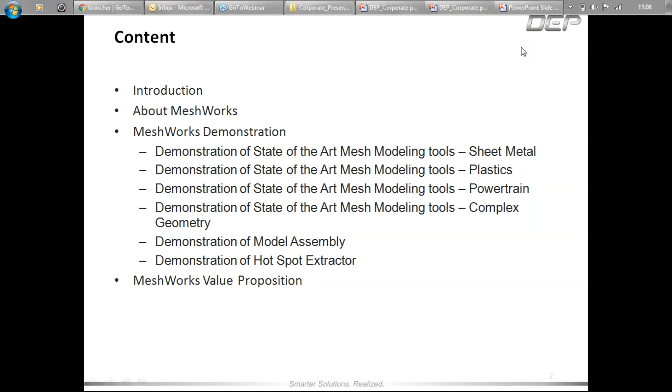Moving to the next slide about Meshworks - I'll skip this and focus on this: together with EDS, we are looking forward to presenting this as a CAE platform, which can help you from model building to model integration, and also enable your CAE/CFD models to the level of multidisciplinary optimization. As Shri Kumar rightly mentioned, from the EDS suite today you are benefited with Tosca, which is doing phenomenal work in the area of topology optimization, and Simulia, which is the solver of choice for many nonlinear purposes.

Meshworks will come in very handy if you are trying to build a design space for Tosca or a parametric model for Simulia. That's exactly what we mean by calling it a multidisciplinary optimization front-end tool.

This will enable you to go all the way from automotive. If you're from an aerospace defense industry, you will still find it relevant. If you're from a heavy engineering background, there also you will find it relevant. If you are even from biomedical or biomechanics, even then the entire tool set is very relevant, because Abaqus or Simulia is widely used for hip implants, knee implants, and cardiovascular devices. You will also find it relevant if you are looking at shipping, as well as energy, which is the oil and gas sector.

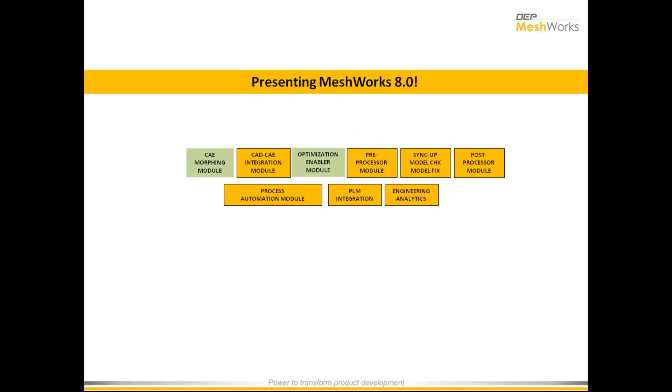And Meshworks is not a new kid on the block - it has been around for quite some time. We are the leaders in morphing finite element and CFD models and preparing them for optimization.

Now, what has happened is, from Meshworks version 8 onwards, we have integrated all the CAD libraries so that we could right away take the model from CATIA, in the native format or as an IGS, STL, or STEP format, bring it into Meshworks, do all the model building work, and then export it to Simulia or Tosca, depending on which is your solver platform.

And then if you want to set it up as an optimization, you readily have the complete parametric library in Meshworks. You can parameterize your FE/CFD models and get them ready for optimization. Meshworks also provides a process automation module, where you don't need to be an expert in TCL, TK, or Python. So a CAE user can create process automation for his entire standard operating procedure. That's the value that DEP brings to the table.

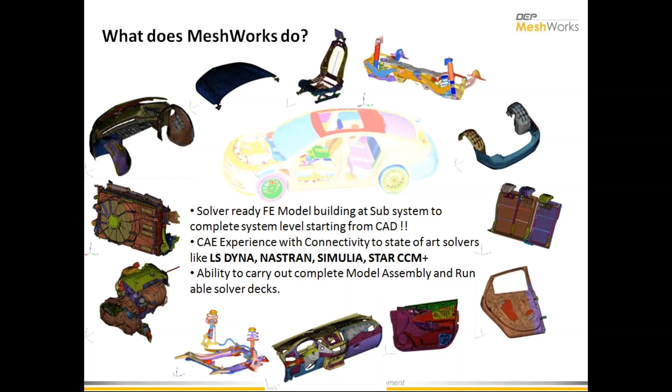The other benefit of Meshworks is that it can prepare models of different kinds, especially in this automotive context—interiors, exteriors, body structures, powertrain components, driveline components—all of it can be modeled as components, subsystems, and assembly, and also get them ready to run in Abaqus or Nastran, Simulia. For CFD, we could get it ready to run on Star CCM and Fluent. So you can essentially call it a CAE platform for your model building exercise.

A brief attention to the key differentiators, as CAE users you have the option of multiple model building platforms, and we do appreciate that. The key differentiator from the Meshworks perspective is that the models you build in Meshworks are automatically parametric, like how we build in CAD. So making a fillet radius change and all that becomes very easy.

With the integrated modeler, in the time it takes to build a durability model and an NVH model, you can start off with a durability model, and at the same time the NVH model is a derivative out of that—so you can derive one model out of the other very quickly. That's the power of the integrated modeler, and it almost saves you 50% of the time in terms of model building.

An automated modeler is also very important—like I mentioned, we don't have to be an expert in TCL, TK, or Python to create automation in pre-processing. Meshworks does it for you.

And the associative modeler is a very powerful tool, where if you have an existing mesh and a new CAD, the mesh can be automatically updated to the new CAD. That's quite powerful, and these are the features that make Meshworks stand out and really help the CAE users.

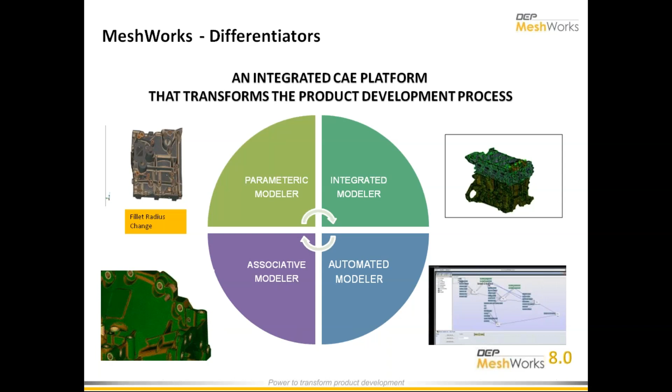We have a long history of partnership with Simulia, as well as with iSight and Tosca. So users of Simulia are already getting benefit if they are also using Meshworks at certain locations. We already see some solution architectures where models from CAD are driven into Meshworks, and then a parametric mesh model from Meshworks is working with Simulia. The value is a very tight workflow for you, which saves a lot of time, and the data goes in and out seamlessly.

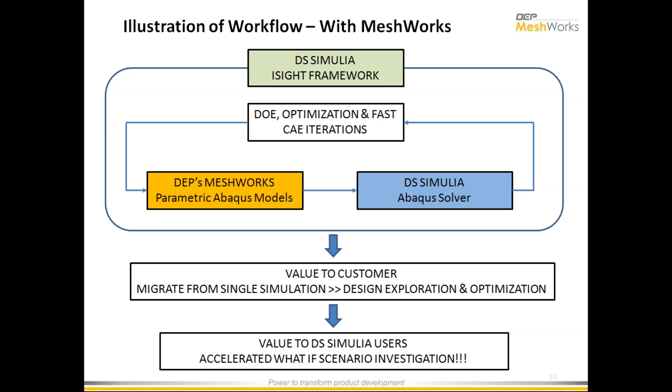That is very important for you whether you're looking at pure play engineering judgment based work, or if you're looking at an optimization based work. Even then, with either a Tosca workflow or an iSight workflow, Meshworks is there for you to handle the mesh models. So we have a completely built up multidisciplinary optimization architecture with Dassault Systems products.

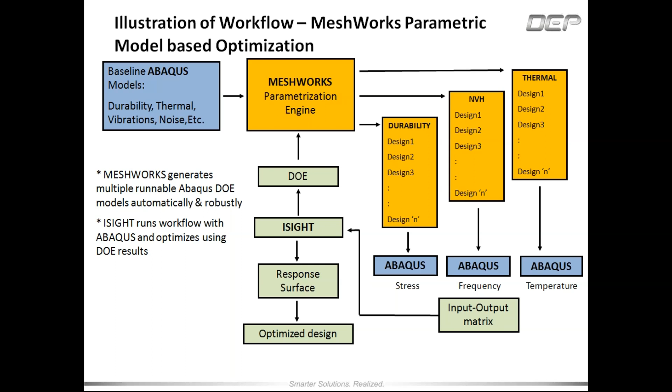This is also available—we have published several literature, and we will be sharing that through EDS to any of you who want to access it. So it's a pretty versatile platform, since if you're having CAD on one side and the Dassault solvers on the other side, Meshworks nicely packages in between and helps you take your CAD model and get it ready to run on these solvers.

So this was the introduction that I wanted to present to you, and I would now share the stage to Gautaman, who is going to walk you through and mention the advantages of our mesh modeling tools, which is the bread and butter in terms of sheet metal modeling.

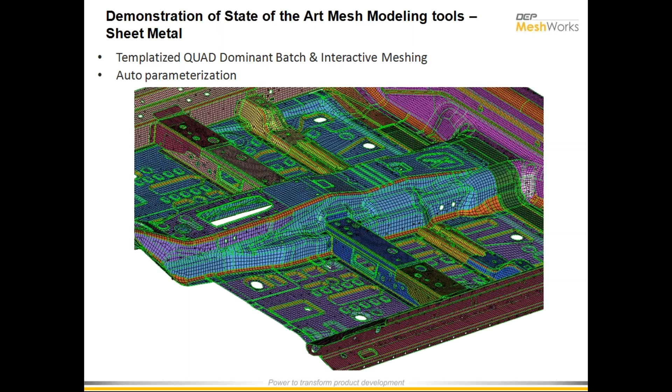And subsequently we will also see how Meshworks really works on complex plastic models—it not only meshes them but also assigns the thickness and gets them ready to run on the solver. There are some examples that my colleague Gautaman is going to share with you. I'm just browsing through the screen so you get an idea of what we have in store.

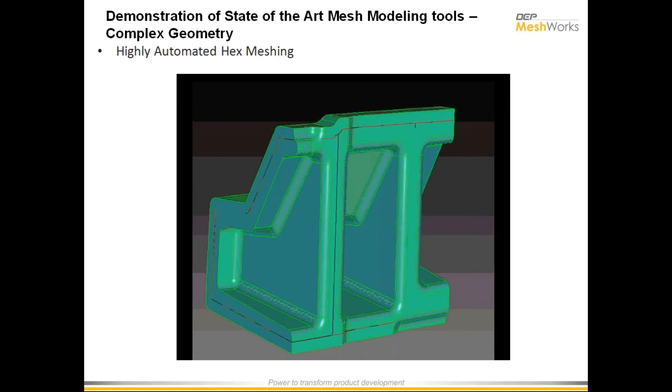He's also going to walk us through hex meshing as well as tetra meshing related areas—one example of complex intersected geometry and how hexa meshing is done. This is not the typical hexa meshing we're used to in other pre-processors; there's a unique way, and Gautaman is going to share that with you. Some of these things can be done in a few minutes, especially the intersected hex meshes.

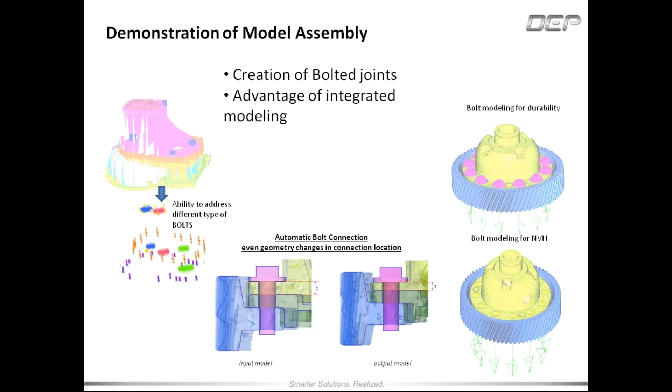We're also going to share some of the model assembly tools, be it 1D model assembly as well as 3D model assembly with contacts and pre-tensioning, which we are used to in Abaqus. We'll also pay attention to automatic contact fixing tools, which is a very important requirement for Simulia users. We're going to pay brief attention to that, and then we'll also see the hotspot extractor.

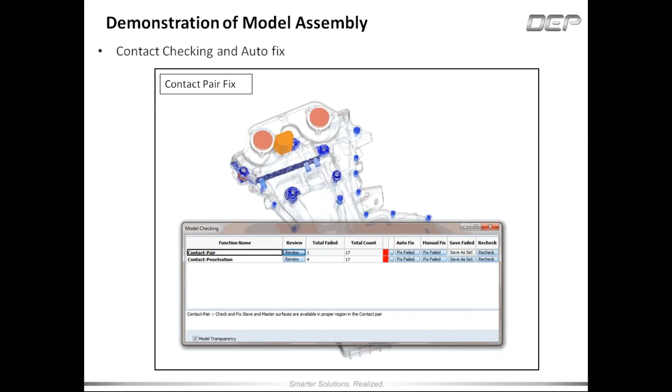This is another tool where even if you are running analysis with multiple load cases and we have different hotspots at different locations from different load cases, Meshworks helps you see a unified picture and identify all the hot locations in one shot. This can help us do downstream parameterization or feature-based addition to make the geometry better and meet the requirements.

So on a whole, this is what Meshworks saves you. It saves close to 40% of your modeling time at the very least. And there are certain very powerful tools like integrated modeling, parametric, associative, and automated modeling, which are going to save a ton of time for the user. That is our key idea that we want to present through this webinar.

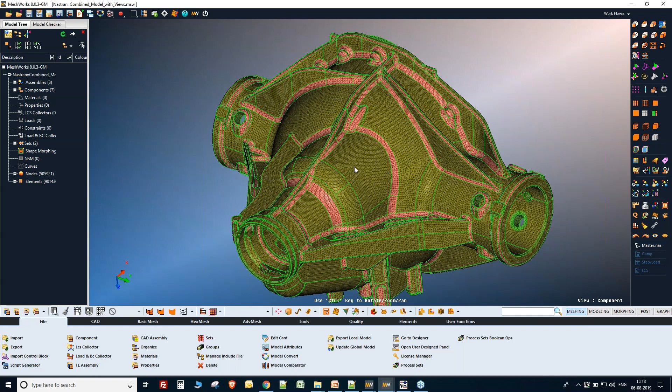As the process is running, I'd like to go to the other window where I've generated this tetra meshing and explain what is actually happening in the model. As you can see, based on the templates, the fillets are nicely identified and organized into different collectors. So I'm just going to open the mesh control panels.

This is what the mesh control panel is going to look like. It consists of all the necessary inputs like the mesh type, the target element size, etc. And we have the feature identification parameters where we identify tubes and apply specific mesh conditions on these tubes, as well as create washer zones if required by the user.

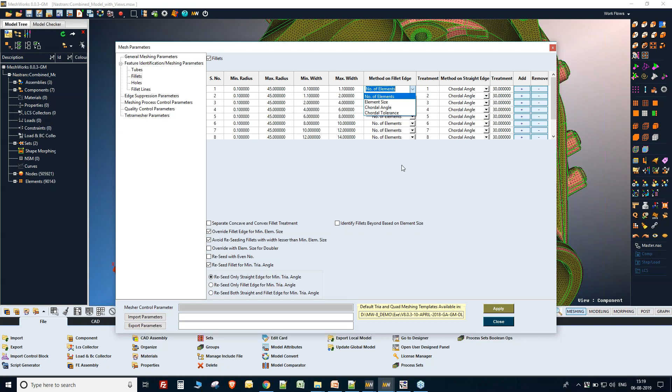Similarly for fillets, the user can add multiple rows. He has the freedom to choose whether to go by number of rows of elements, chordal angle, chordal tolerance, or element size, etc. Finally, we have holes and fillet lines for sheet metal components, edge suppression parameters, process control parameters, and quality parameters, which include both 2D level as well as 3D level. And finally we have the tetra mesh parameters.

One interesting point here is the user can also choose a layered tetra mesh if required, even for casting components with variable thickness. The tool automatically identifies in the background where there is a uniform section and keeps the number of layers as specified by the user.

Now that we have seen the template, I'll walk you through some of the locations where you can see the three collectors, which is fillets, and then we have the tubes along with the washers as per the mesh template and the non-feature region.

So the identification and the mesh application is done in the background based on the template. I'll just give it a few more seconds for the process to complete.

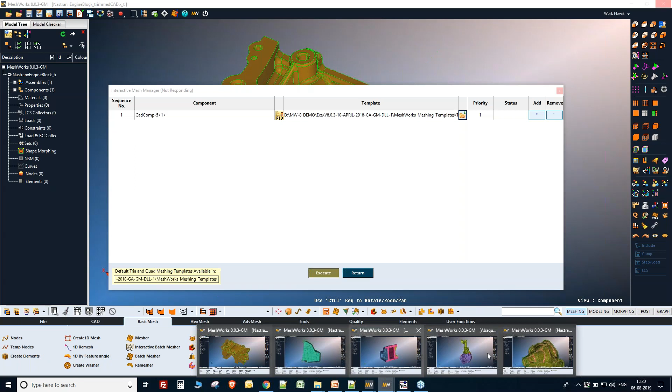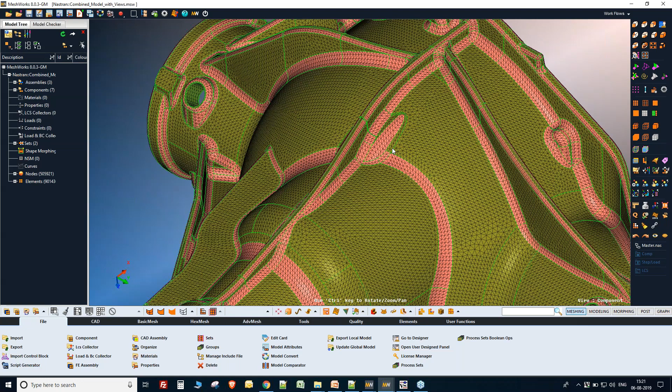So here we are not doing any kind of CAD cleanup on the model in order to provide a good mesh flow or a good mesh quality. Everything is taken care of in the background itself. Once the process is completed in this particular model, I will zoom in on certain locations and show that to you.

So here the user can add multiple rows. This is an interactive batch meshing process, wherein the user can load an assembly model and choose a lot of components for a single template, which can be tetra meshing or sheet metal meshing, etc.

This is also available as a batch mode, meaning that you can create a folder which has different assemblies, and then just give this folder as an input so that you don't have to load the model in the background.

And the cool feature is even if you have an assembly with a lot of sheet metal components and a lot of welds, sometimes the weld data also is there in the assembly. Even though you can just give it in batch mode, the tool automatically identifies all these kinds of sheet metal components and only meshes those parts.

So now that we have completed the tetra meshing, I just do a return, and now all the components are organized into different collectors. Let me do an auto color where you can see nicely the fillets, the tubes, and the washers.

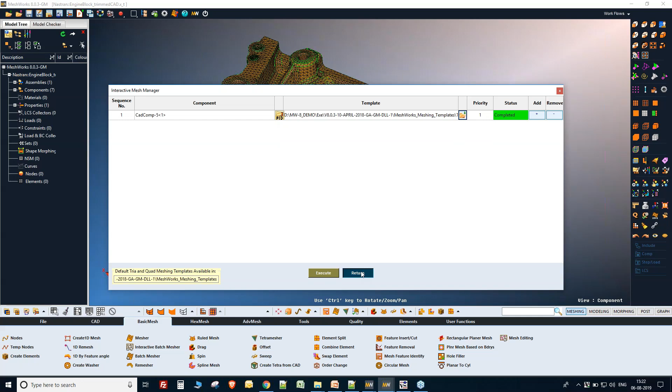And it's quality correct as well. So you have both the 2D level and the 3D level. Let me just hide the skin.

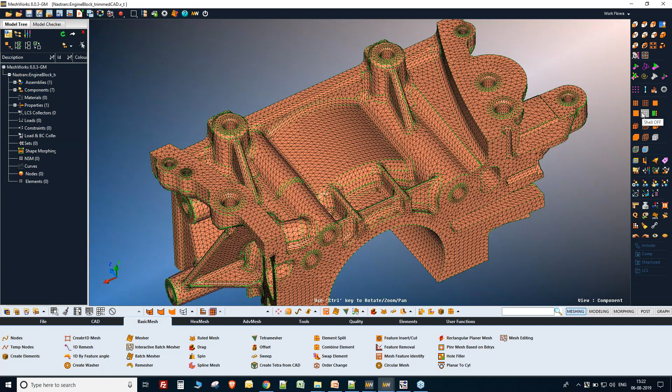And if I zoom on to some of these locations, you can actually see some sliver surfaces, and all these sliver surfaces are corrected in the background itself so that all the elements are passing the quality criteria.

And the next important point here is, as Karthik mentioned, once we do modeling in Meshworks, the model becomes parametric, meaning that after doing the post-processing, I want to improve the stresses in these regions.

So naturally, I go to fillet radius change. And if you want to do any parameterization on these fillet radius changes, it's very simple. We have a standard parameter called auto parameterization casting, which enables the user to just select the surfaces he's interested in and provide a range of value and create the parameter.

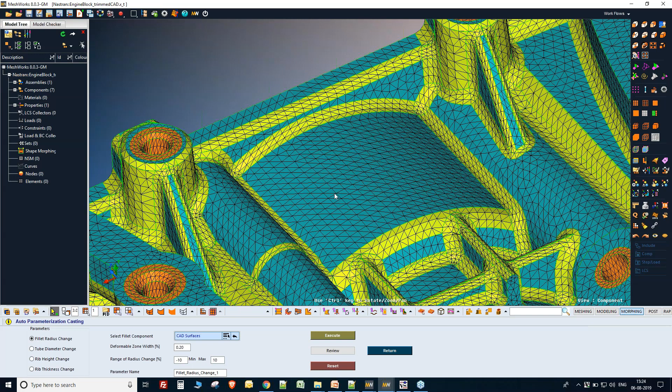So we have 4 standard types of parameters: fillet radius, tube diameter, rib height, and rib thickness. In this case, let me just select a couple of surfaces where I would like to do the parameter and provide a range. It's going to be a percentage change, minus 20% to plus 20%. And just execute - it's just a simple selection and execution.

And once the process is executed, the tool nicely gives feedback of what is the current radius of the fillet. In this case, it is given as 3mm. And as we review this parameter, let me link the parameter.

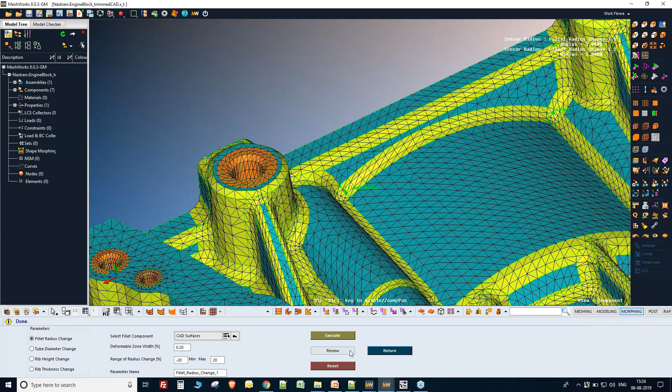So now the radius has been changed from 3mm to 3.6mm, and then I'm now reducing it. All these changes are on the FE level. So this is the fillet radius change.

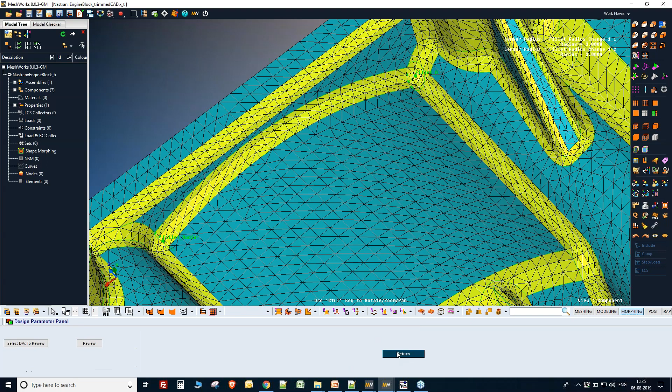And I would like to also show you another example where we are going to change the rib height thickness. Let's say we would like to improve the stiffness in these regions, and the user can just go into the rib height change parameter, select the surfaces that you would like to change, and provide a range. In this case, I'm going to provide minus 1.5 to 1.5, which is an absolute value, and just execute.

So the tool intelligently in the background identifies all these kinds of features. Since we have done the meshing, the intelligence is stored in the file, and this enables the user to quickly do all these kinds of changes.

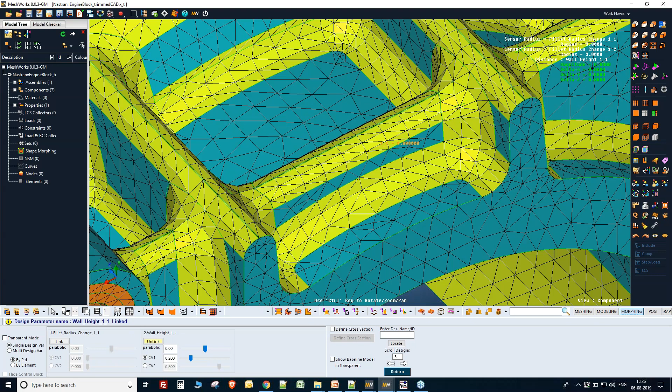So let me go ahead and change the parameter. So this is the rib height thickness change.

And similarly, we have other parameters which will enable you to create a parametric model quickly based on your post-processing results.

And moving on to the next demo, I would like to show you the plastics meshing capability. Many times we spend a lot of time doing these kinds of plastics meshing. Simple plastic parts like door trim, hard trims, even though they look very simple, a lot of time has been spent on quality correction, feature capturing, and thickness assignment. And even when we go to complicated plastics like front fascia, rear fascia, bumpers, exterior components, etc.

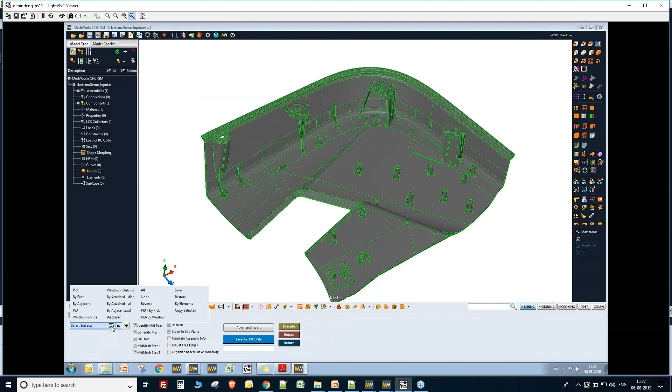So in Meshworks, it is a fully automated process wherein the user can go into the auto midplane mesh generation, choose all these default steps, which is identifying the features, the midplane pairs, generating mesh, stitching all these features like dog houses and locators together, and then inserting these features onto the base mesh, doing all the necessary mesh flow correction and quality corrections, and making sure the output of this tool is exactly in the mid location. We have inputs based on element size or identification of pairs and remesh quality, etc.

So I've just selected the model and I'm just going to say execute. Since it's going to take a couple of minutes to complete the process, I would like to take you to the next window where the process is actually executed. It just takes like 3-4 minutes to complete this process, and here it has been completed.

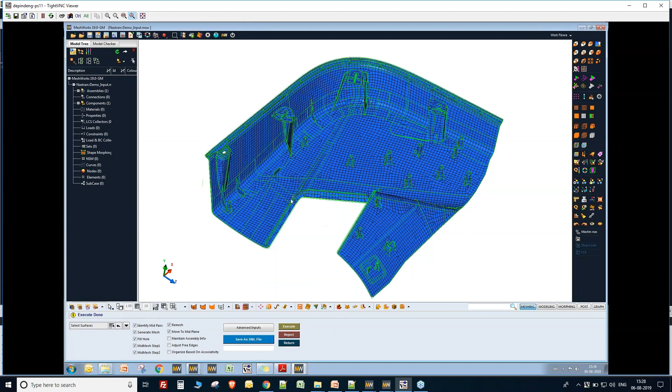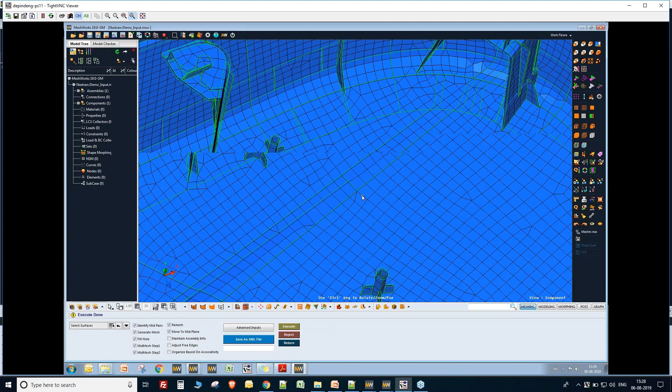So ultimately, the output is going to be a mid mesh that has been completely stitched and flow corrected, quality corrected, etc. And as you can see, the tool nicely identifies all the kinds of features in the CAD model and preserves them when doing this auto meshing.

So in one shot, the user can expect a good auto mesh. There are also certain tools which enable us to do a lot of manual work, which is what I'm going to show as the next demo.

In this model, I've just executed the first two steps, which is primarily identifying the mid pairs and generating a mesh. So all of them are not stitched together. Now, if the user wants to go through a manual route, let's say because of improper CAD data, certain areas are not stitched together, the user has the freedom to use these nice tools to quickly complete this task.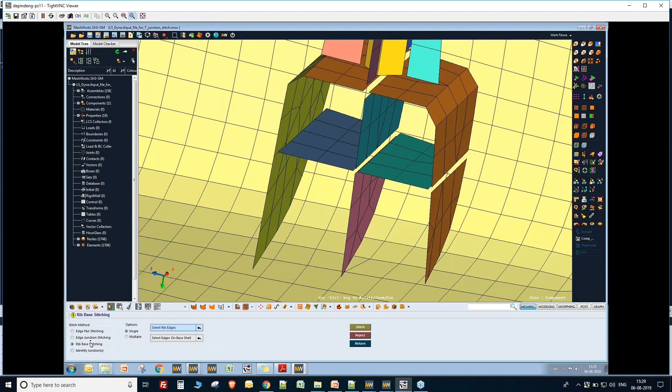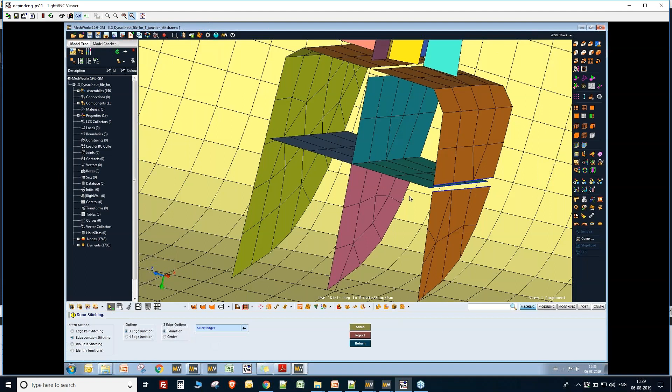In this example, we have a 4-junction rib wherein I can directly go into the junction-based stitching and select all the 4 edges in the model. Once the edges have been selected, you just do a middle click and it gets stitched. Similarly, we have some 3-junction capabilities where the user can select all the 3 edges in the model and then just say stitch. So this is a kind of manual route.

The user, if he prefers to go to a much more automated route, that is also capable and available in MeshWorks. Here, I'm just going to select the entire model, and in this particular area, where there are a couple of junctions, I'm going to give a tolerance and say identify junctions.

So the tool nicely identifies automatically the 3-junction, 4-junction, etc. And in one shot, we can select all these assemblies and then say stitch. So this is also possible - the manual route as well as the automated route.

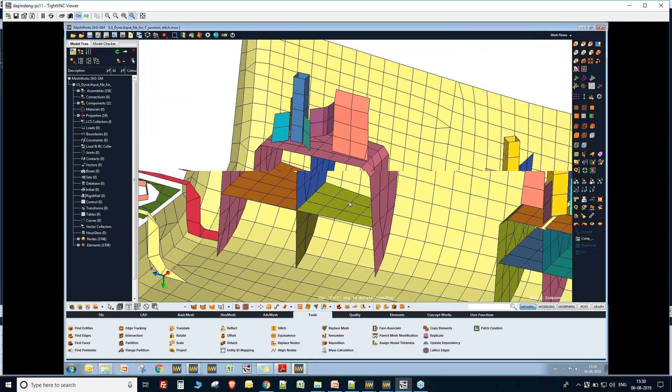So the output of this automated tool is going to have a very good effect, that nicely preserves the features as well as the quality. And the second aspect is thickness assignment.

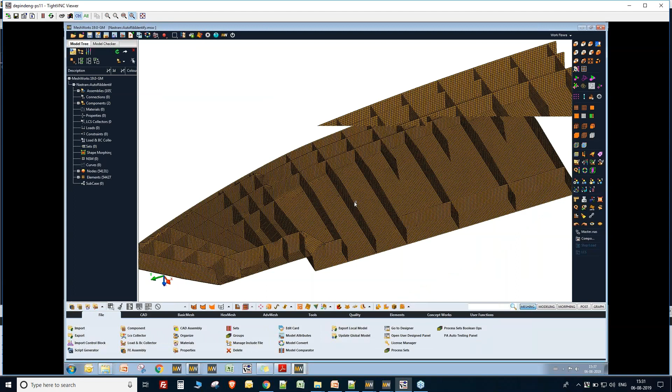Most of the time we spend thickness assignment in these kinds of ribs where we would require a layered kind of thickness assignment. So for that also we have a separate tool wherein the user can go into assign nodal thickness, and we have the rib thickness function.

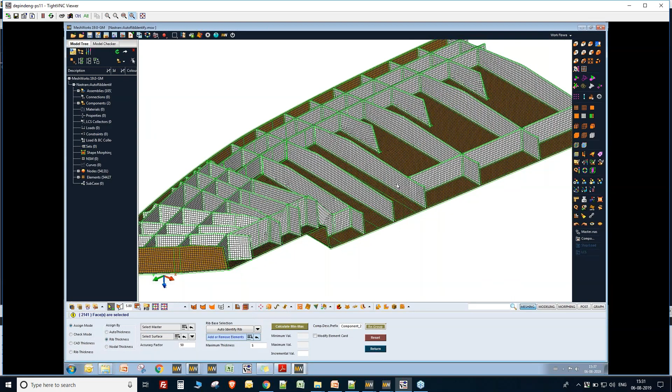So I'm just going to select the master component, which is a mesh, and then the surface. And I'm going to use an option called auto identify ribs, which will automatically identify the ribs in the model where we would require a layered thickness assignment, and then provide a maximum thickness, let's say go to 10, and calculate min and max.

Based on the surface, it calculates the min and max thickness in the model, and we can provide an increment value of, let's say, 0.1 or 0.2 based on customer requirements, and say create group.

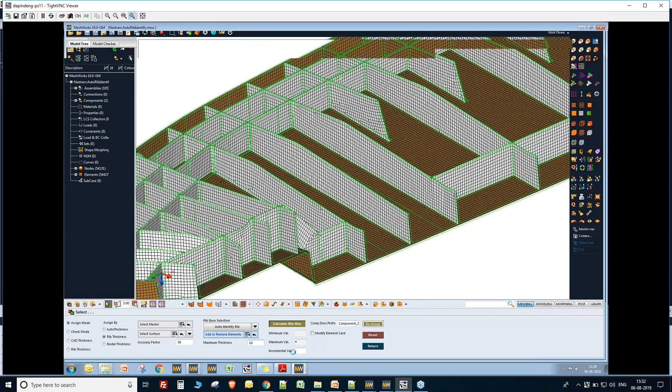Here I'm just going to give an increment value of 0.1 mm. So for every 0.1 mm change in thickness, the tool is going to create a new collector and assign them.

So we do have an assign mode wherein we can go with the regular option if the model doesn't have too many ribs, or we can go with auto thickness. If the model has a lot of ribs, we can go with the rib thickness tool. And sometimes the customer also asks for nodal thickness assignment, where all the thickness is stored in the element card itself instead of creating new collectors. So that is also possible.

So with these kinds of tools, we can expect a lot of efficiency. I think it's just going to take a couple of seconds more.

And once the thickness is all regrouped, we can also check mode, which will give us a kind of visualization of the thickness in each area and whether the tool has nicely identified and recreated it or not. So here, as you can see, it's nicely created a layered kind of thickness in all the rib areas, saving a lot of time for the user.

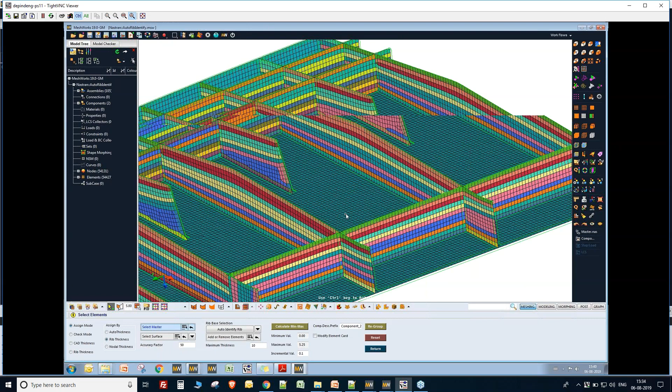So this is the thickness assignment tool. And the next one is the sheet metal component. So this is a floor example, very similar to our tetra mesh. We can quickly set up the interactive batch mesher.

Select the model and then choose a template. In this case, instead of going for the tetra mesh, we are going to generate a mid surface mesh, then do the meshing. Here I would like to create a 10mm mesh and say execute.

So this is actually a solid component. In the background, the tool identifies these as solid components, extracts the mid surface, meshes them, does all the quality correction, flow correction, and then also applies the respective properties for these components. So whenever you have an assembly of upper body or lower body and you want to do these kinds of mesh activities, it can be done in batch mode, just overnight or in a 2 to 3 hour time frame, where the output is going to be a model with good mesh flow and properties all assigned.

So the suppression and surface editing options, all the hard point propagation, everything is taken care of in the mesh template level itself.

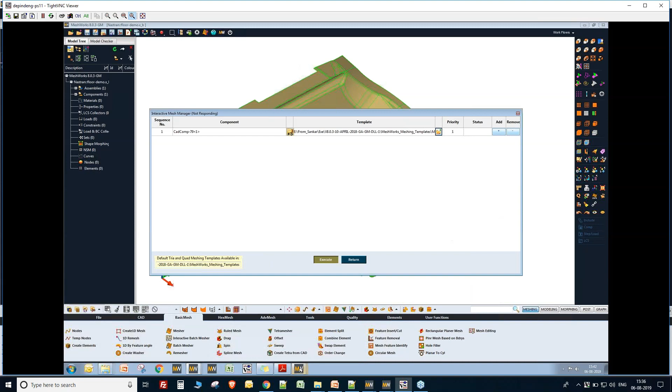So here also the user can utilize features like holes. If the user wants to identify holes, create washers, or avoid certain holes or close out certain holes within some diameter, that is also possible. And fillet lines where he would like to create some nodes based on a range, and fillets where the user can choose number of layers or based on chordal angle or tolerance. So all this flexibility is given to the user, and this template can be saved and reused whenever we have a project of similar kind.

So the process is now completed. Now, as you can see, if I do a refresh, we would have a mid-surface component.

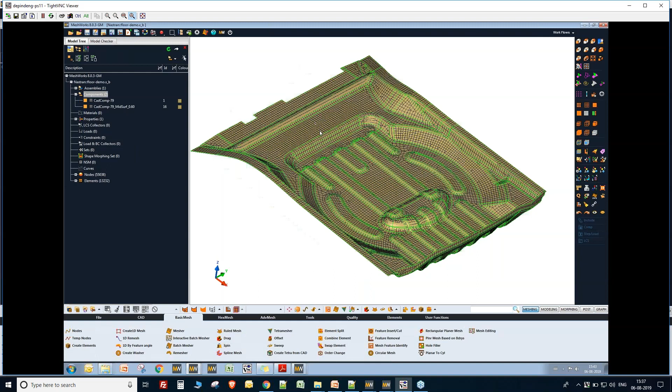And meshed. The mesh is taking place in the mid surface, and the properties have also been assigned. Just to review, the thickness has been assigned to the component.

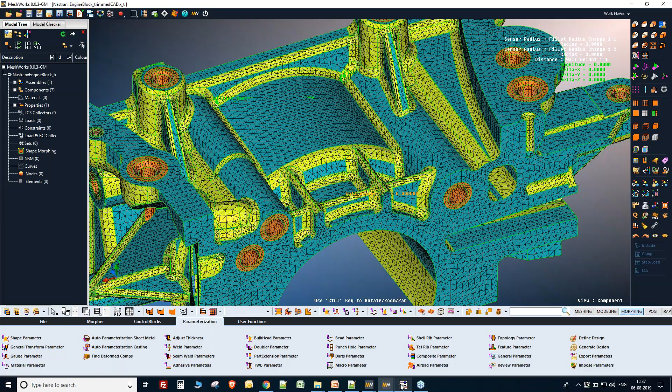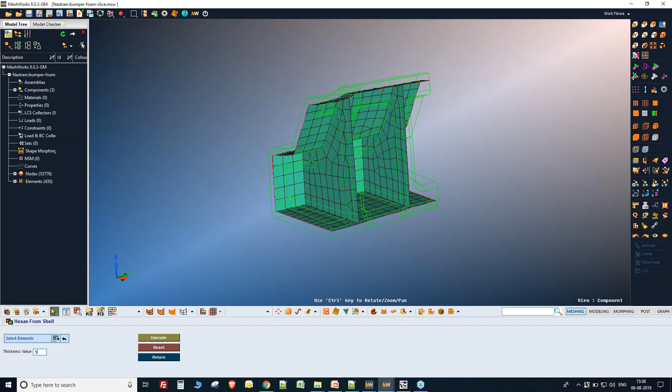So I've just done a mid-surface meshing using the previous example of auto mid-surface mesh. And then once this mesh is derived, we need something called a core mesh, which is like a 3D model that does not exactly match the boundary, but captures the internal volume. So I'm just going to give a 5mm thickness and generate this mesh.

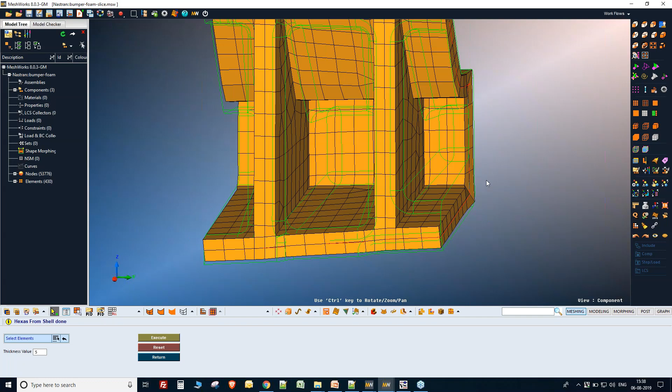As you can see, it captures almost 80% of the internal volume, but it's not necessary that it has to capture all the features. In this region, it's not captured all the features, similarly in these regions as well. In certain areas it is also overlapping. So this is what we call a core mesh, which ideally needs to capture 80% of the internal volume. This file has been saved and used in the subsequent next step.

And the next step would be to mesh this local model, and the type of mesh or quality criteria is not actually needed. So it can be a tetra mesh or even a tessellation mesh with no quality. In this case, I've just meshed it, and then organized all these components in order to capture the features.

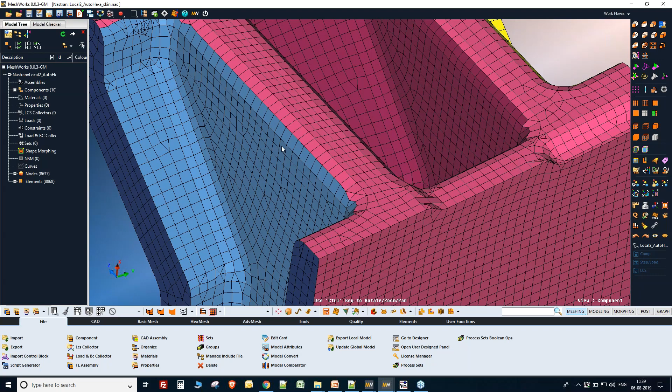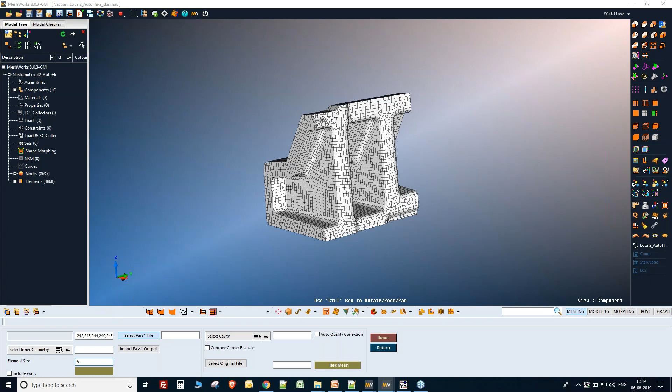I'm just going to import this file. As you can see, this was our file in the previous step, and with these inputs I'm just going to select the cavity and say execute.

So we have our hex mesh. I'm just going to hide the skin so that we can see our hex mesh. And wherever we have organized, you can see that nicely the mid node is being captured or aligned as per our requirement.

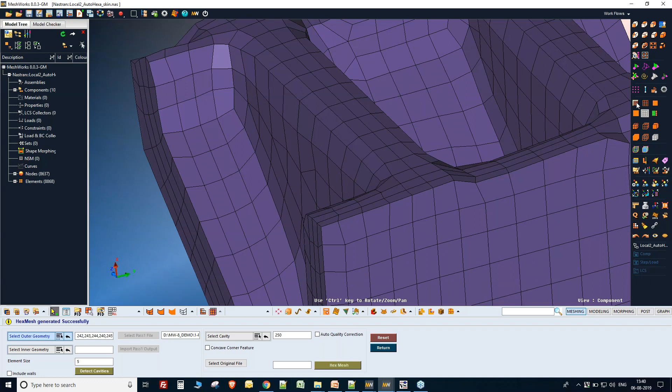And if I am to take a cross-section view, this is going to be the output of our hex mesh. So this is one of the methods where we can quickly generate hex mesh for these kinds of models. Similarly, based on the models, we have developed numerous methods to quickly do these kinds of meshing activities.

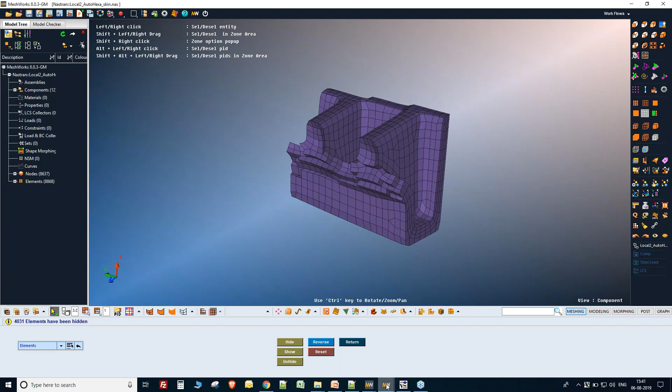So far we have seen the capabilities of tetra, plastics, sheet metal and hex mesh, and now we will move on to the next one of connections. So the next one I would like to show the capabilities of both 1D bolt connections as well as 3D bolt connections. Here we have a model where the connection has not yet been established, and we have the model assembly tool wherein the bolt connection tool itself is in a very automated way, wherein all the requirement is to select the components where the connections have to be established.

And then I'm going to select the unthreaded portion, which is this portion, and then provide a diameter range to identify the holes. So the tool is now detecting the holes between this diameter range, and it also gives the user the freedom to select or deselect additional holes if required.

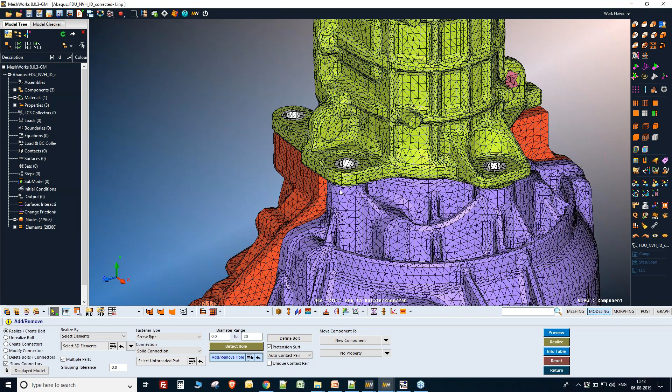So here, since it is a solid connection, I would like to show the demo for only 2 locations in the interest of time. So I'm just going to deselect all these holes. So only in these 2 locations we are going to generate a solid bolt.

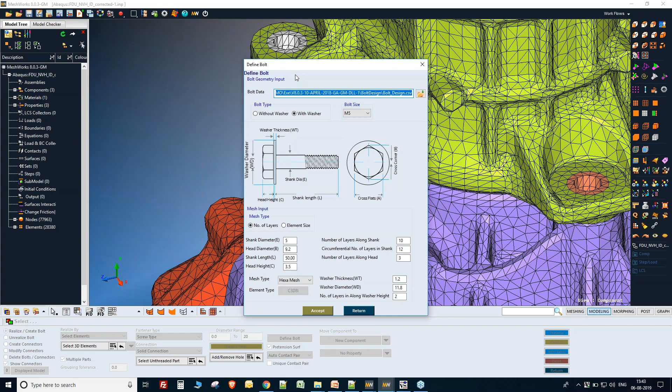So here we can go into the Define Bolt. We've already calculated the diameter. This is going to be an M6 bolt, and we can create a bolt with washer, without washer, based on the number of layers or element size and the mesh type, hexa mesh or tetra mesh. So once all this has been filled out, the user can just say accept, or if he already has a template, the CSV file can be modified to accommodate all these changes automatically.

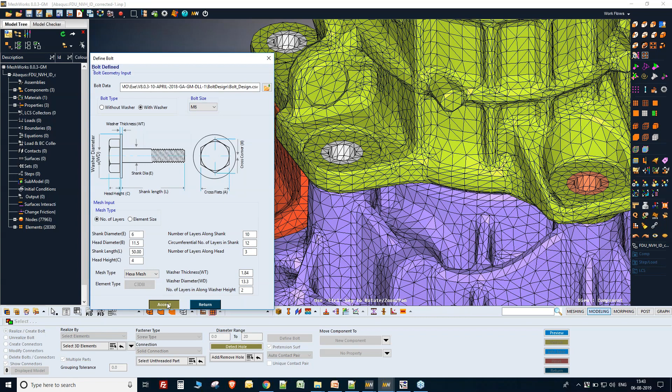And here I'm also going to check on the pretension surface, wherein it creates automatically whenever the bolt has been created. So now I'm going to say preview.

So whenever these kinds of 3D bolts are created, when we check on this pretension surface, the pretensions start, as well as the contact between the shank and the hole, as well as the flange and the bottom portion of the bolt head is also created, which would save a lot of time.

So if the user wants to go for a 1D bolt connection, instead of going into the solid bolt connection, the user can choose what is the type of connection that is required. So here an M6 bolt has been created with washer as per our requirement.

And if I were to put everything in a transparency mode and show you the surfaces or the pretension surfaces, this is the pretension surface that has been created automatically, as well as the regular contact surface between the shank, the hole, and the bolt head and the flange.

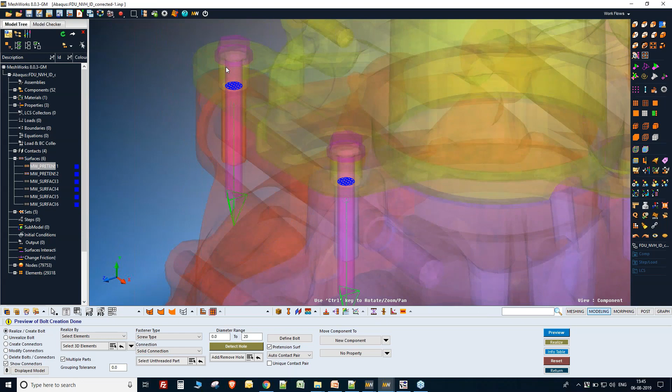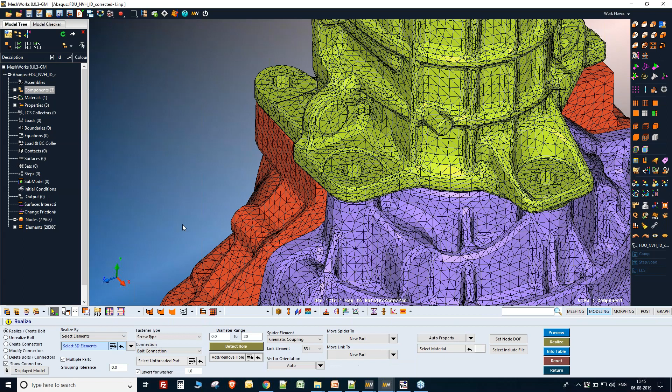So let me just do a reset. And the next demo that I would like to show is creation of 1D bolts as well. So let me get out of this transparency view and the bolt modeling tool, wherein instead of a solid connection, I'm going to choose a bolt connection with screw type. The inputs are all very similar: the 3D elements, the unthreaded portion, and then the holes to detect between a given range.

And once the tool has detected, just like our previous step, we can select or deselect the automatic identification area. And we can also change the configuration. So here, this is the area where the bolt needs to be created.

And I'm going to select my kinematic coupling. Link element is going to still be my B31 configuration. And I'm going to choose an auto vector. And material alone, I'm going to give a default material and say preview.

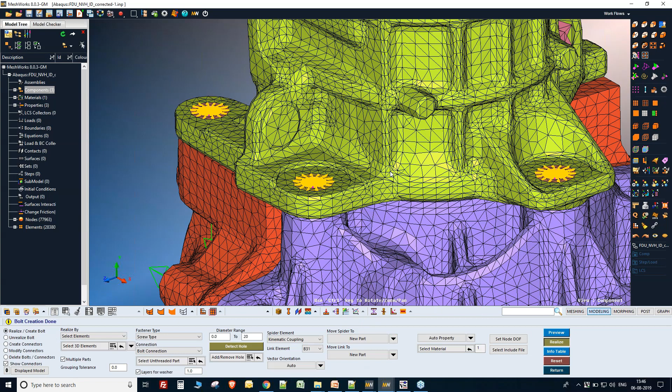So these are all like standard parts. If you have an existing component where all the spiders and beams need to be moved to, that is also possible. So I'm just going to say realize. So now all the holes have been created between a given range in one shot.

And let me do a transparency view as well. This is on the bolt creation.

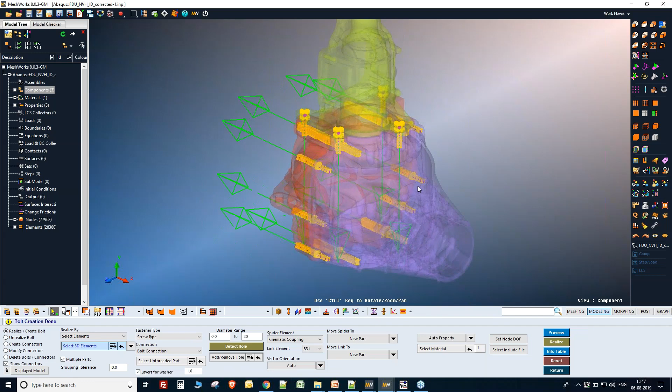So far we have seen meshing and modeling, and the next one, the most time-consuming part for us, is going to be the model checker. That is, the model that we have built - is it matching our customer requirements?

Typically it takes more than a day in order to review whether the contact surfaces, the bolts, the beams have been assigned proper properties, all the components have been given proper material properties, etc. In order to do this in an automated way, we have created a tool called the model checker.

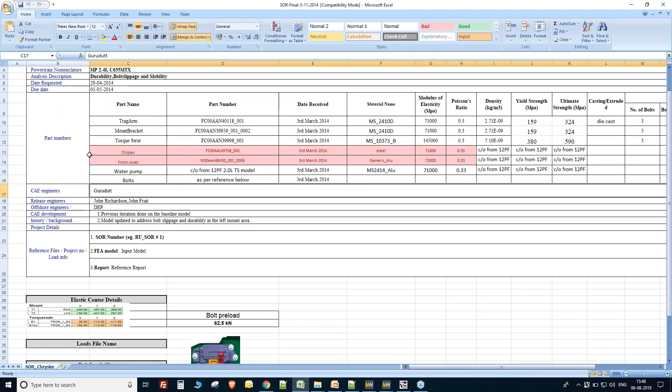So here we have something called an SOR sheet, wherein all the inputs like what is the part number, what is going to be the material, what is going to be the property, and who is working on these kinds of models is being given. And this SOR sheet is the input for the model checker.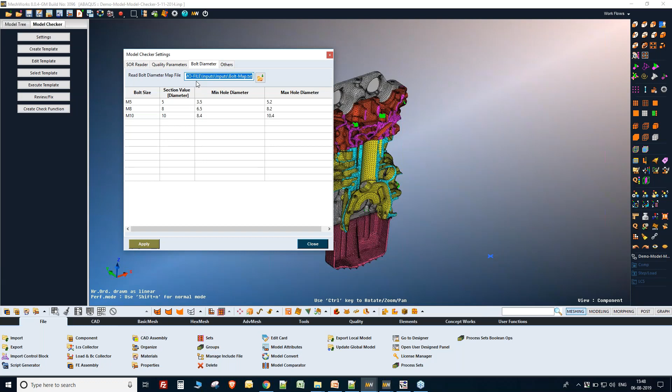Automatically the quality parameters, the bolt diameter - if we have a separate file, it is taken care of - and other parameters like the washer diameter, whether it is 1.5 times, 1.6 times, etc., how many washer layers should be there, what is the contact penetration min and max tolerance, and the contact pair check tolerance - all of them have been filled out.

Once it's filled out, we can go and create a template. So here we have templates based on assembly - whether we are going to check for contact area, contact penetration, or specific load cases, or meshing like material property assignment, RBE3 weight factor, etc. So here I'm going to select all these parameters and provide a name.

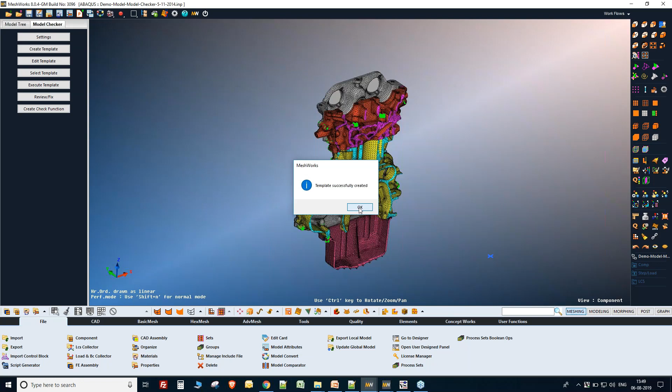Just trying to check how much time we have on the clock. Do we have another 5 minutes to go, or? Yeah, we have another 10 minutes. Sure, thank you - sorry, Gautam, to interrupt you.

No problem. And now if the user wants to edit the template, you can go here and edit the template. I already have a standard mount mobility check, and just now we have created the demo template. So I'm just going to select the demo template and say execute.

Based on whatever inputs we've given in the SOR check sheet on the model, the tool is automatically going to check for all these kinds of issues in the model. For example, bolt diameter check - what it does is check whether the properties of the shanks are being assigned correctly or not. It gives you a nice progress view also.

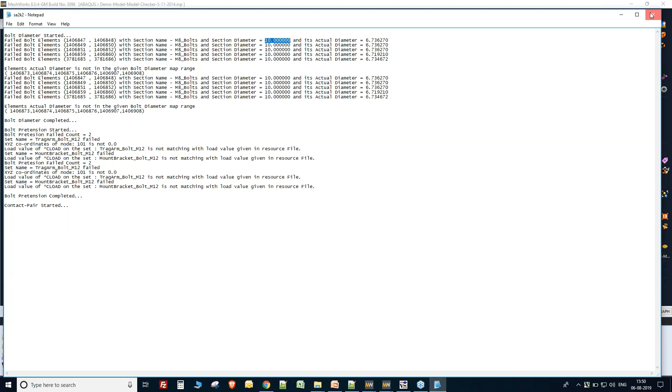Once it has been completed, we get a temporary status data, wherein we can see that some of the bolt elements are failing - it is actually an M8 bolt of diameter 6, but the section properties have been given as 10mm for the B31 element. So based on the SOR sheet, the tool nicely identifies all these kinds of issues, and then the next step would be to review or fix.

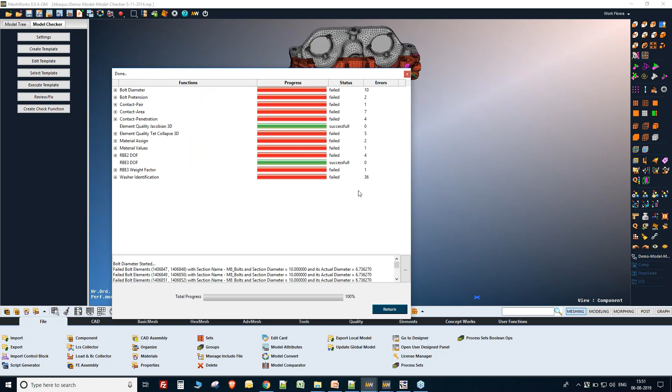This is going to take another 2 to 3 minutes, and in the interest of time I have already done the check, wherein it is failing for most of the errors. Once this has been executed, the second step would be to review and fix the data.

Let's say, for example, I'm just going to put the model in transparency view and check the bolt diameter. So it's saying there are some failures, and I'm just going to say review - this will highlight whatever locations are actually failing.

So it is failing in a couple of locations, marked in red color. We can either save it as a set or automatically fix it, taking the inputs from the SOR sheet. So now we are fixing the bolt diameter.

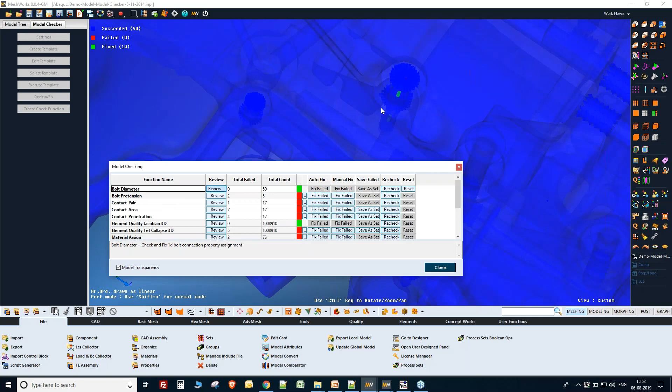The second one is going to be the pretension, whether the pretension loads have been applied as per the SOR sheet or not. Similarly, contact pair - whether the master and slave surfaces have been properly generated, or in certain cases the master will be in some locations and the slave would have been in other locations. Now it has been fixed automatically. Similarly, we can go for contact area, contact penetrations, etc.

When it comes to bolt pretension, it shows that in certain regions, highlighted in red, the magnitude is not matching with the SOR sheet, and we can say fix failed.

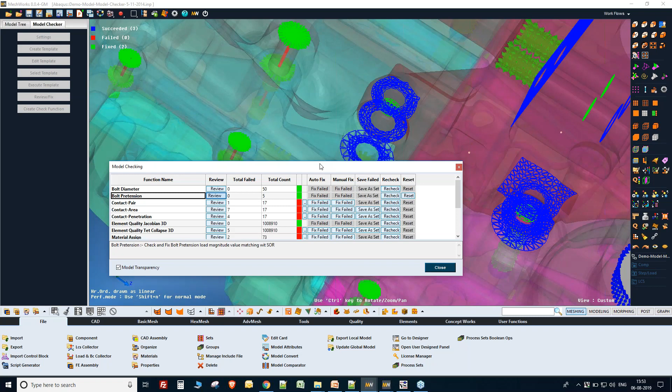And the failure gets fixed. So the model checker is a tool which can be used to save a lot of time for these kinds of model validation before submitting the run.

So that's the model checker, and the next one is going to be the hotspot extractor. So far we have seen everything in our pre-processing module, and in one window itself we have the meshing, modeling, morphing, as well as the post and graph.

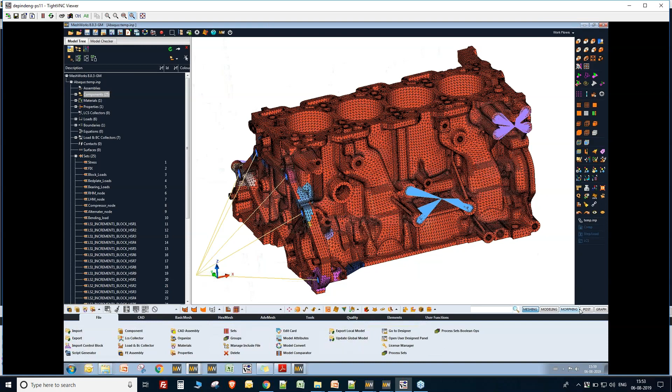The next example is going to be the hotspot extractor, wherein I can directly go into the post-processing module, and I've already plotted the stress components. Since today's demo is going to be predominantly on the hotspot extractor, I'll directly jump into the utilities where we have the hotspot extractor.

Here we have to choose the input file, output folder, and the ODB file. Here we can choose which steps we are interested in, and I'm going to be interested in all the steps - step 1, step 2, step 3. So let's take the first 3 steps in this example.

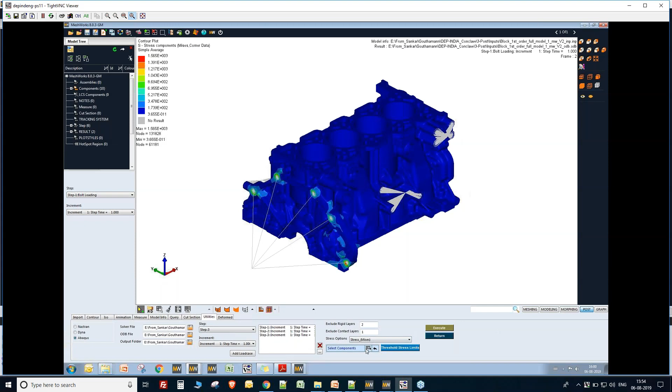Then I'm going to choose how many layers to exclude from the rigids - 2 layers to exclude, and 1 layer we need to exclude near the contact regions. We're going to choose von Mises stress, the component is going to be this component, and the threshold stress limit is going to be, let's say, 150 megapascal.

Based on these inputs, when we say execute, the tool nicely gives us a model with sets explaining which is the area that is failing for our threshold value, excluding these kinds of regions - rigids and contacts. Let me go into the next model where I have already imported the file in the interest of time.

So here the different colors represent the area that is actually failing, for different load cases. So here we have sets - let's say this is load step 1, and all these element sets are failing for load step 1.

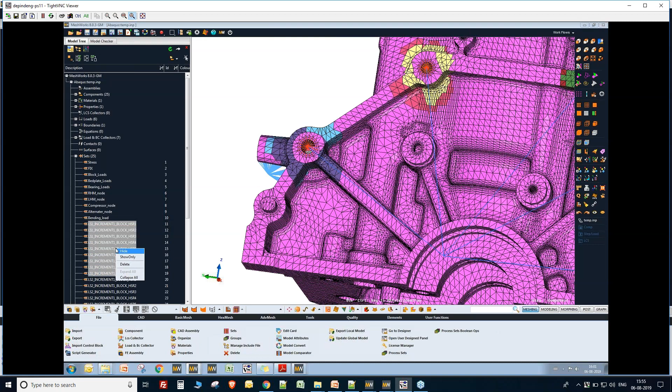So if I do a show only, we can see that these are the regions that are actually failing for load step 1. Similarly, load step 2, load step 3, etc. This will give us a nice idea, based on the load step, of which region is failing.

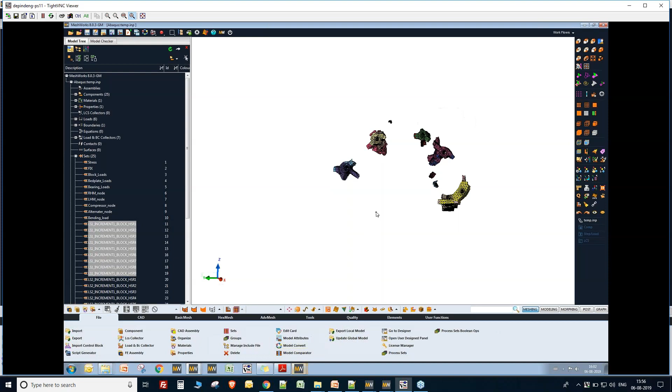And once this has been generated, we can use our auto parameterization tool to do the necessary design changes as per the hotspot extractor result. So this is on the hotspot extractor, on the post processing.

Yes. So that's it from my side, Karthik.

Thank you very much, Gouthaman. Thank you for all the demonstration that included all the way from the mesh modeling tools of different types of meshes - sheet metal, plastics, and tetra meshing, auto parameterization, model assembly tools. I think this gives a good flavor to the attendees today on the variety of value that Meshworks brings to the table as a pre-processing and post-processing tool, and also bridging all the way from CATIA to Simulia.